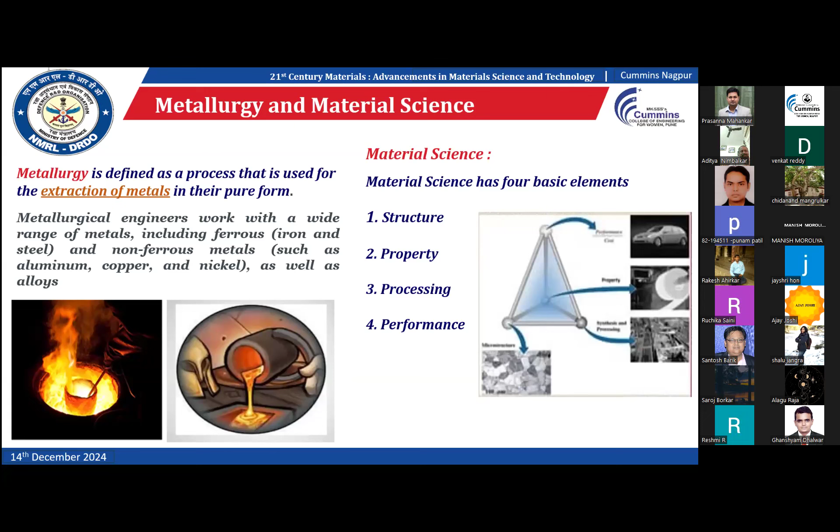Material science basically involves destructive and non-destructive testing. Non-destructive testing is done after the product is formed, and destructive testing is done before. Basic characterization requires chemical analysis, tensile strength, impact strength, and fatigue strength. So that is the difference between metallurgy and material science.

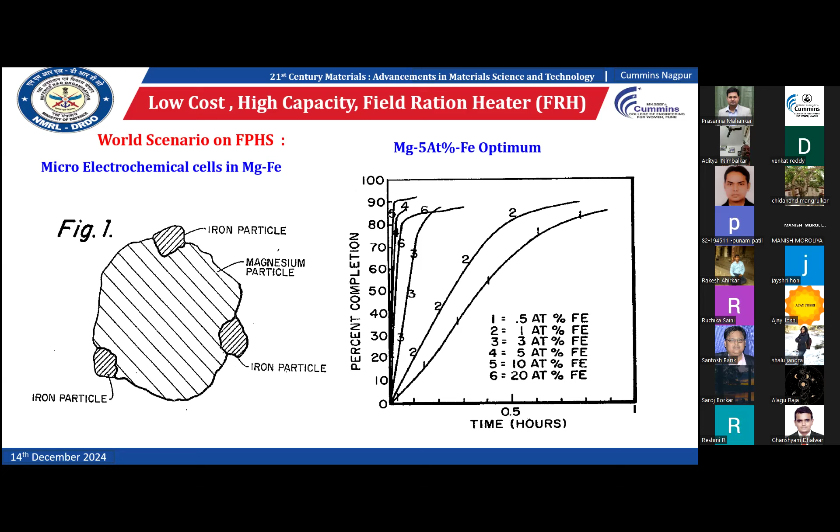Now I would like to discuss the first material we have developed: a low cost, high capacity field ration heater. It basically started from America, using magnesium and iron - a patented technology from the USA. We took this magnesium and iron composition and added extra aluminum. With this patent, they mentioned the heat containment and heat release, converting material at -5 degrees Celsius into normal temperature. It took 12 minutes and reached a maximum temperature of around 62. But in our case, with this patented technology, we use aluminum, iron, and magnesium with 5% iron.

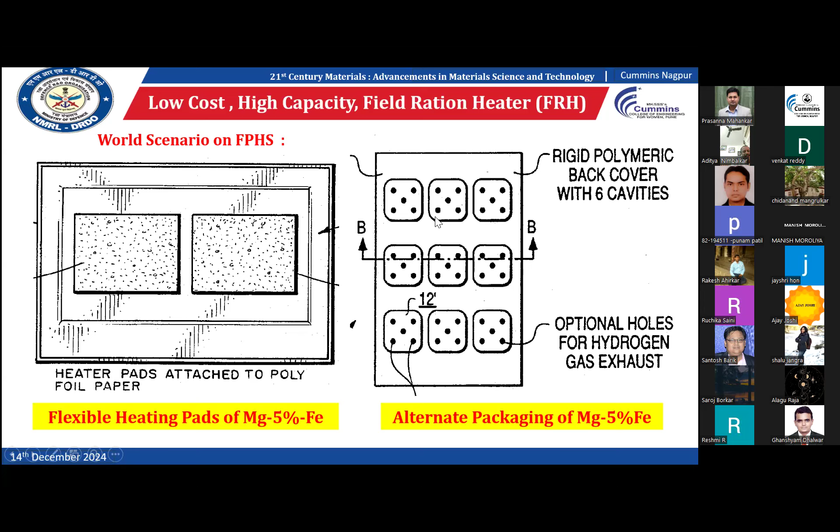They use polypropylene cloth to hold the material. So we took this patented approach and carried it out at NMRL. Here you see 28-gram material used for 300-gram pulao, ready-to-eat meal, which is a requirement from the army. In the army, during winter, the outside temperature is around -35 to -40, and soldiers can't eat properly - they only get one piece of rice from the ready-to-eat meal provided by our government. Also, aircraft cannot land during winter, so we needed a way to convert pre-cooked material back to ready-to-eat condition. That's why we developed this technology.

So instead of just magnesium and iron, we add aluminum, and this creates an exothermic reaction. There is a requirement for formation of microcells, meaning layer by layer material. For that we use ball milling, keeping the aluminum, iron, and magnesium in the ball mill for up to 14 hours, then we screen this powder for use in this application.

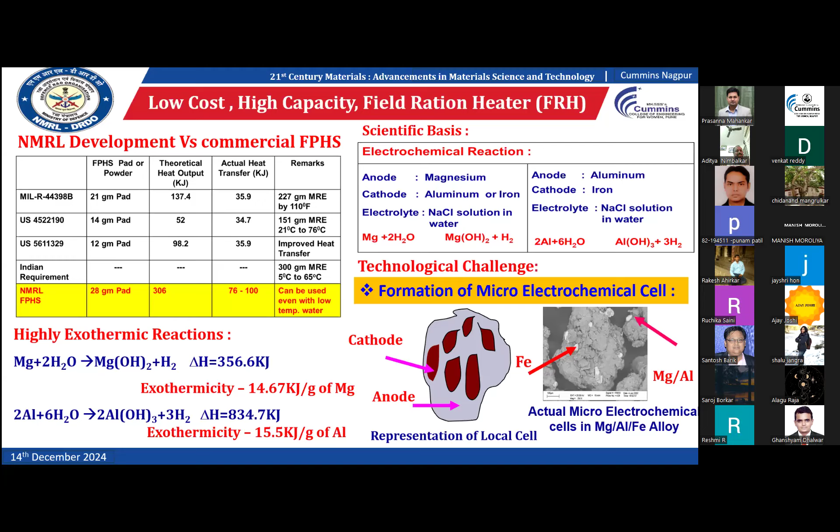In terms of cost benefit, the USA material with magnesium and 5% iron costs 1 rupee, while our Indian version costs 0.39 rupees. With only 2 grams of material and 2.5 ml of water added, you get a temperature of 85 to 95 degrees, starting from an initial material temperature of -5 degrees. We use 28 grams of this material for 300 grams of pulao, easily available in the ready-to-eat meals provided by our government to soldiers.

We carried out tests at -5, 0 degree and 5 degree temperatures. This graph shows the material reaching from -5 degrees to 85-95 degrees within 15 to 20 minutes.

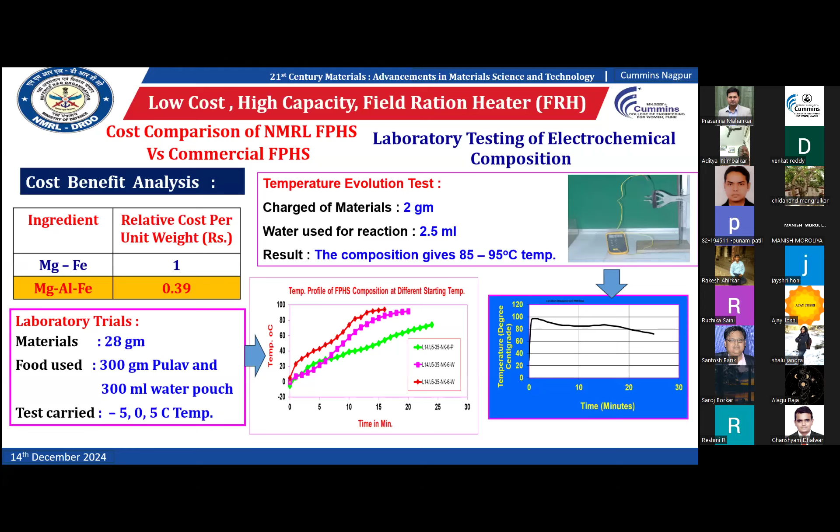It is close to our pressure cooker temperature, which is a good thing. After that feasibility study, we carried on laboratory trials. We converted these and demonstrated the trials at K-top, which is the highest height above sea level, 18,000 something.

So we demonstrated the kit - this is the reusable bag, this is the heating pad. You see here, there is a powder, we put 4 number of packets on one side and 4 number of packets on another, using 2 heating pads for 300 grams of pulao. We put it into this aluminum bag and add just 50 ml water.

After adding the water on both sides, 50 ml on one side and 50 ml on the other, you see the soldiers doing the job. Within 15 minutes, they got more than 85 to 90 degree temperature. This trial we successfully carried out 18,000 feet above MSL, at Khardung La.

It is very close to the China border. We demonstrated this technology to our Jawans, our soldiers, and our officers, naval officers also, and they were very happy. They wrote a letter to DRDO.

As per government norms, every 3 years they transfer troops to another location. But after this successful development of the new material, they said we cannot shift it anywhere - we will continue for the nation's soldiers on the border. And we got a 5 lakh award from the Vajpayee government for this work.

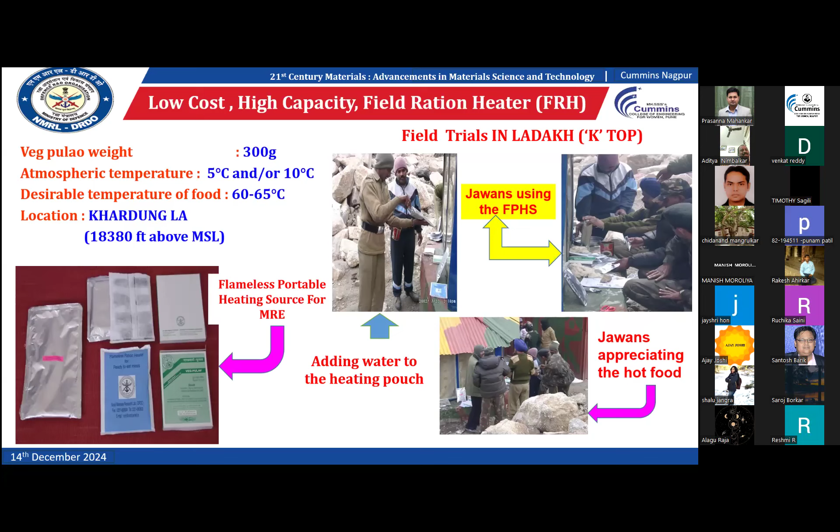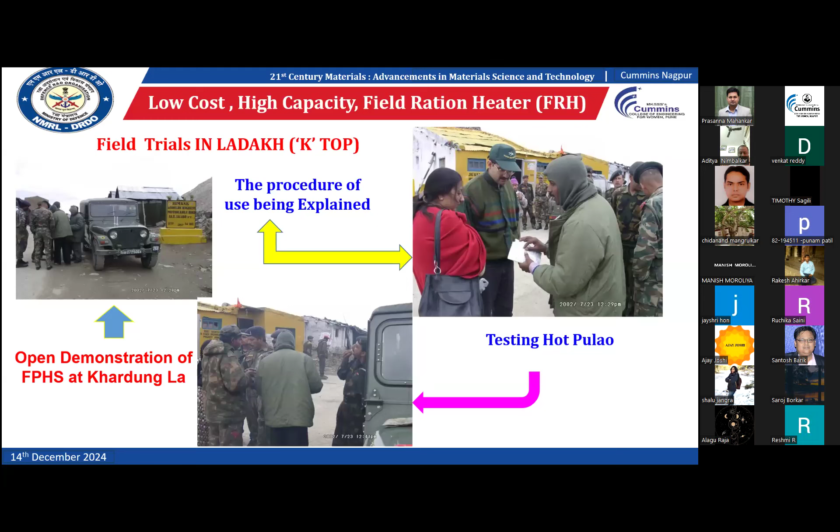Then during our demonstration, some military officers visited, so we also demonstrated that technology to them. After these army and naval applications, we wanted to check the commercial application of this product.

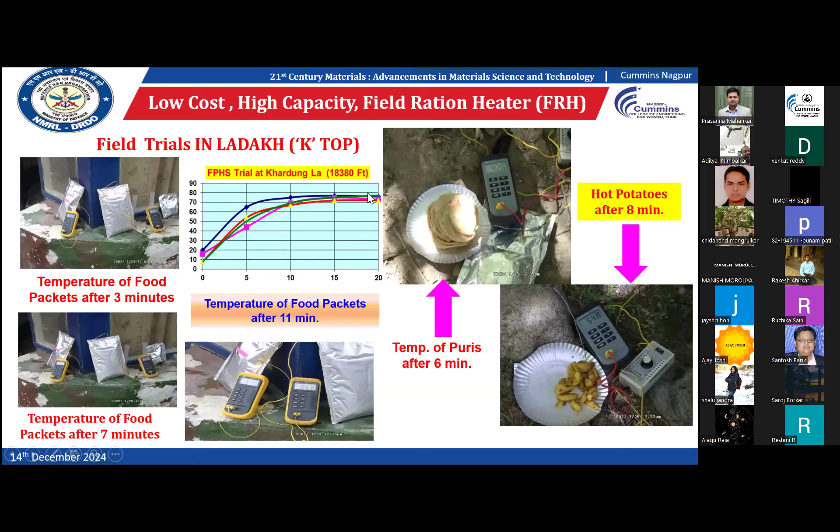So with outside temperature at minus 35 and 40 degrees, we kept some puris and potatoes, and put these puris in our heating pad. We added 50 to 100 ml water on both sides, and in K-top we found that within 20 minutes, the temperature was around 80-85 degrees. So that was also successful.

Another application of this product is for diesel fuel tanks. Before this product was developed, our soldiers used to keep their vehicles running full night. If they switched off the vehicles, the diesel would freeze, and the problem was how to convert that frozen diesel back into normal liquid.

That's why we developed this. They used grass for this purpose too - we found sometimes they would put grass on the tank and burn it on top, and some accidents happened because of this. But after using our heating pads, you see here, minus 50 degrees Celsius diesel converted into normal liquid without adding any chemical inside the diesel tank, and their problem was solved by this technology.

Second, at midnight we carried out trials - this is an ice pot, with chapatis and dal. They gave another task - at the 11,000 feet Karoo troop location, they asked DRDO to carry out trials at Karu at midnight.

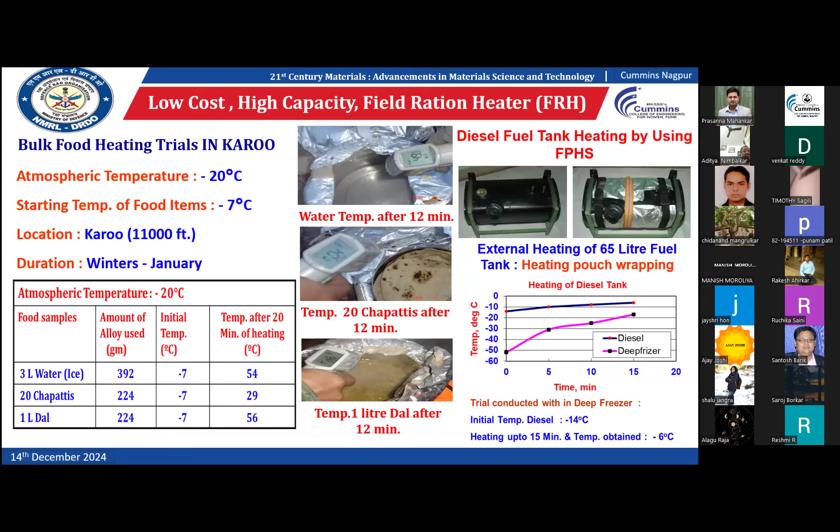Then sir, there is a biggest problem - they apply IV fluid to our soldiers in medical treatment, but outside temperature is very low, so our IV bottle freezes. So they asked us to utilize our composition of this material - magnesium, iron and aluminum - for converting that solid fluid back into liquid.

But the problem is our temperature reaches 85-90 degrees Celsius, and they want - there is a restriction - our body temperature is maximum 39 or 37 degrees. So the challenge was how to maintain the fluid temperature around 37 to 39 degrees, but for a longer duration.

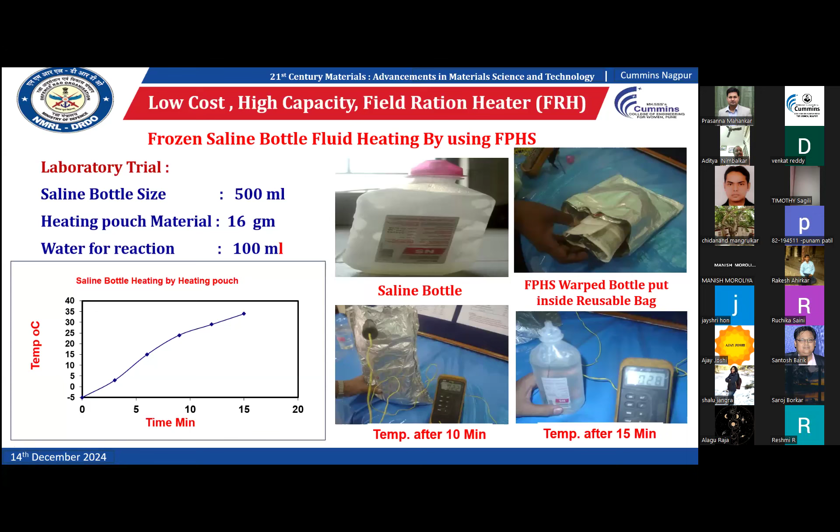And then we found our soldiers had not taken a bath, maybe for 3 months, 4 months also, because they don't get water.

This is the setup actually, and we have patented this, American patent also and Indian patent also for this technology. So this is the technology we have developed and successfully transferred to industries in India for this product only: heating pouch, saline bottles and other purposes for army purpose.

But another requirement they have is body warming for soldiers. They initially had some Bukharis, but those Bukharis are kerosene based, and the top of that Bukhari is open. In winter, with snowfall, snow falls on that chimney, and the entire carbon monoxide comes back, and our soldiers had died.

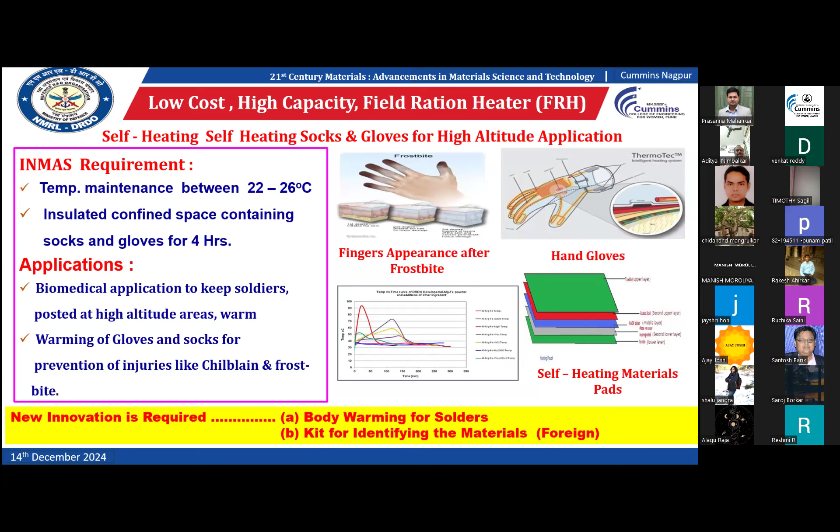So the Singapore person asked NMRL to support this activity, but from some point of view regarding other countries, we are not supporting it. But you can take this opportunity, you can make the powder at your premises and you can do it. So that is the opportunity from this activity.

Another activity is semi-solid metal processing. In this, as you may have seen in previous presentations, there are a lot of composite materials, rolling materials, forging materials, casting materials. We have to develop this material for aluminum technology, aluminum process. Normally people carry out rolling: first melting, then billet making, then extrusion, then forging, then machining. This is a very lengthy process. So this is the beauty of this technology.

We make this material at a very low temperature. Aluminum melting temperature is 650, but we carry out this process, aluminum alloy, in a range of 610 to 630 only. And at that temperature, we press this material at high pressure, around 2000 bar. With that 2000 bar, there is no single porosity.

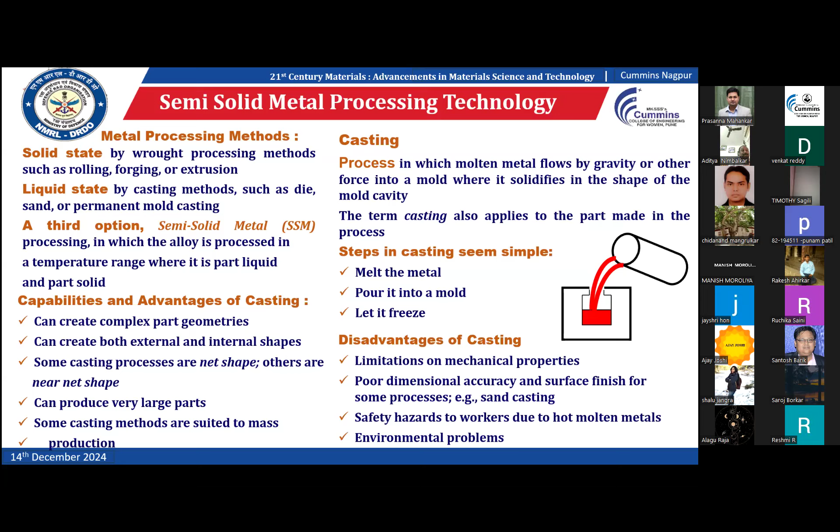But this material is not pure aluminum processed; we require alloy, aluminum alloy. So we will tell you the detail of this technology.

You see here, this is a pure material, cooling curve. Metal starts from cooling. This is the liquid, then cooling. It is a single process step. And here you see a two-stage material: here the material is in liquid stage, here it is solid. So whatever the range is there, the liquid-solid fraction is there.

Those alloys can be used for this technology. That is a challenge. And second thing is that in the solid-liquid to solid transition, there is some time requirement also. If we carry out processing, the material should not be frozen, otherwise the entire thing will be choked. So that is the scientific challenge.

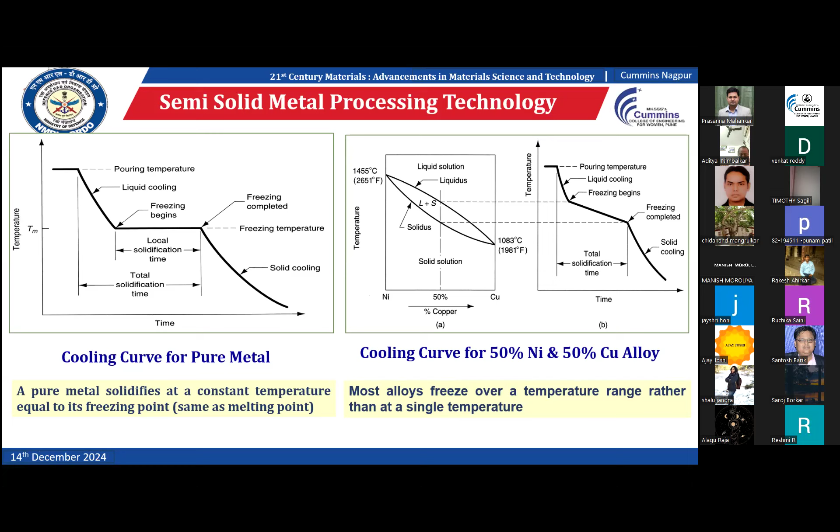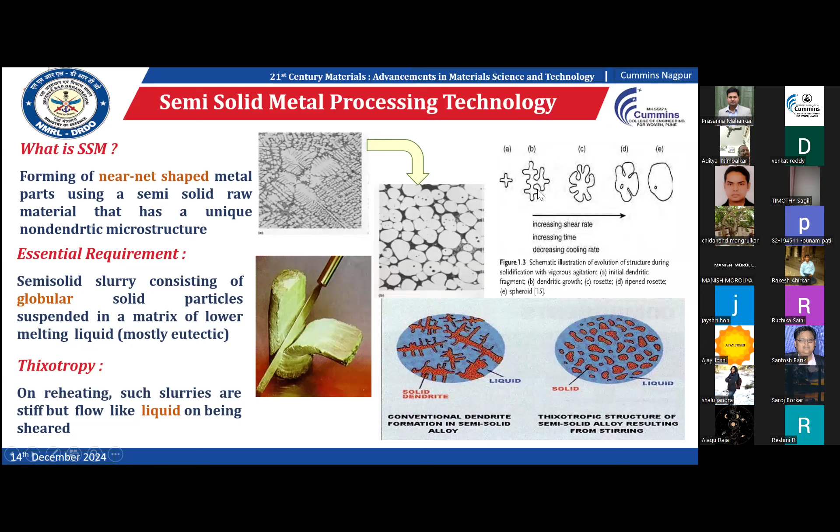Whatever material we utilize for this trial should cut just like this process, just like how we cut tomatoes in our house. Such type of cutting is required. This is the dendritic microstructure normally found in all materials, and we want to convert it into the globular shape. So this is the procedure for converting that dendritic structure into the spherical shape.

This process was discovered by MIT in 1971, and its origin comes from observing butter and toothpaste in our house. That is what gave the idea for this technology.

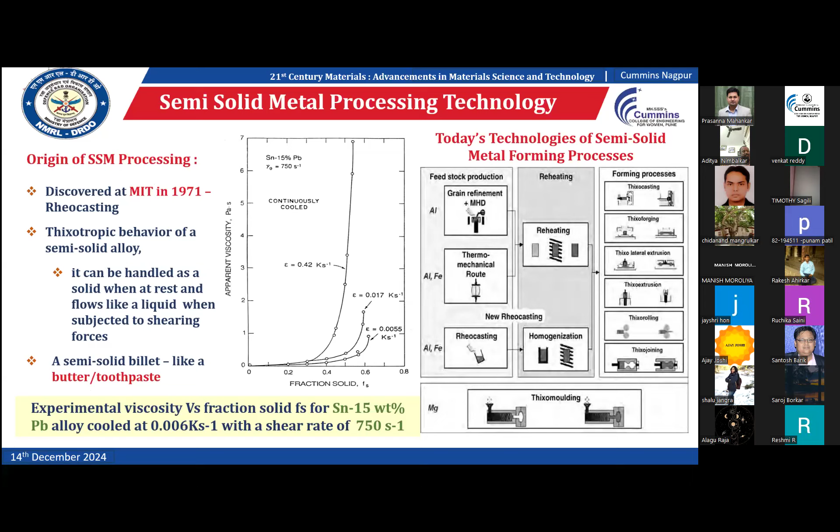There are three steps in this process. First is the slug, whatever the material or alloy - aluminum alloy, we have developed 2014, 6061, 6063. These were developed by NMRL, and we have developed some high-strength aluminum alloy for naval platforms. So we cut it into some shape, reheat it by induction heating into the semi-solid stage, then transfer it into the die.

You see there is a liquid-solid material and time diagram - this is the diagram we require for the calculation, for knowing what time we start the rotating electromagnetic stirring and what time we have to stop. With the help of this, we generate this phase diagram, and we carried out the experiment at NMRL.

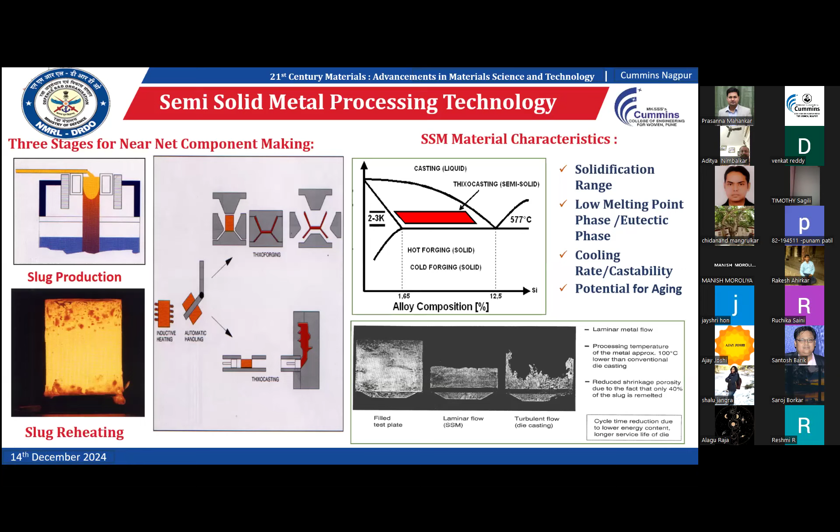Normally, laminar flow is required. Whatever material in your utensils or the normal market - aluminum, steel - that is not laminar flow, it is turbulent flow. That is the difference between our material and normal material. So quality-wise, our material is very high, very good. There is no porosity, surface finish is good, and intricate shapes are possible.

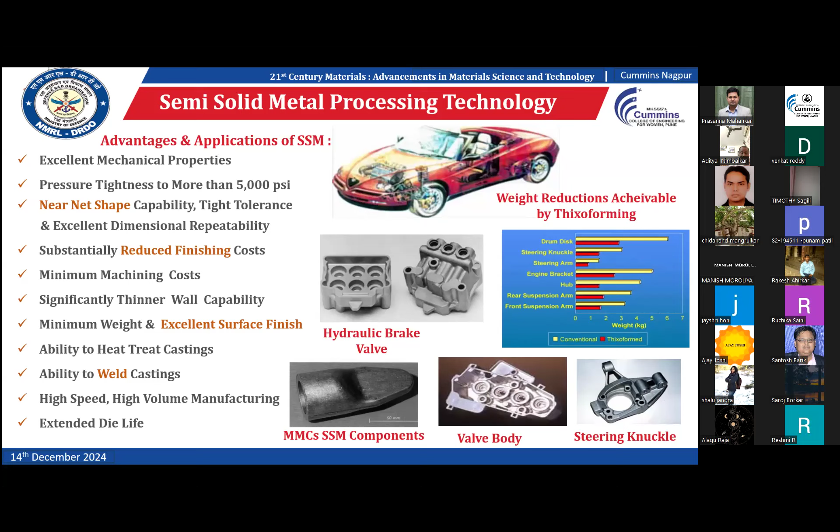This is the first such machine in India - a 2 crore machine in NMRL, and we have developed a lot of components by this technology. You see this globular structure - normally, commercially available A356 material in the market has strength around 200 to 250. We got 320 to 350 with this technology.

And the major beauty of this technology is elongation. We found this elongation is 20%. Normally, the maximum ductility of aluminum material is around 8%. So that is the beauty of this technology.

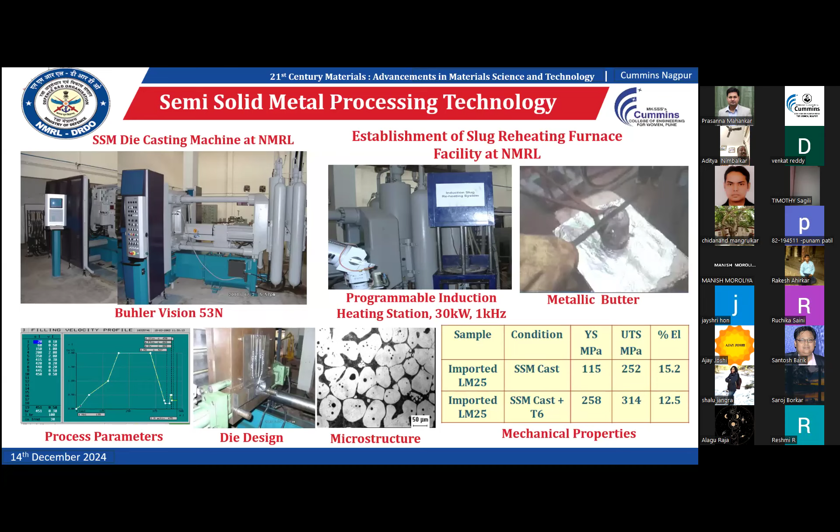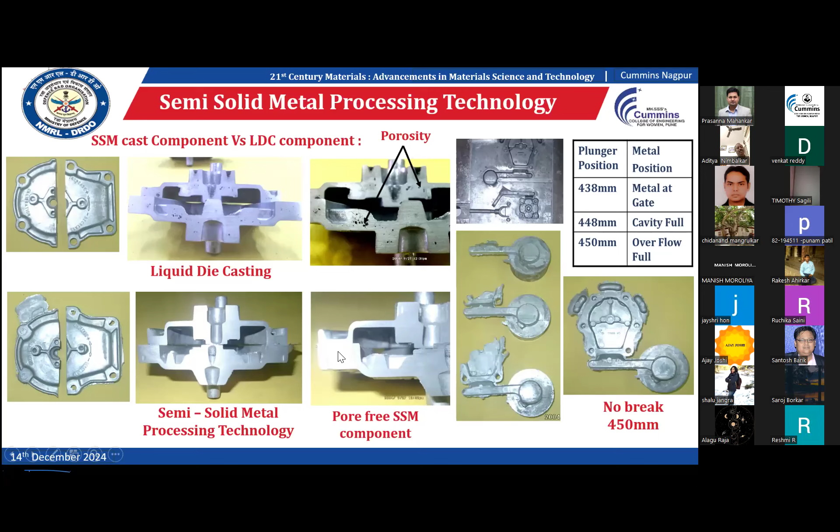I already told you this is the normal component - whatever component is made by the die casting process, you see here a lot of porosity. This component is used in our petrol pump for commercial application by L&T. So they asked NMRL to provide support for making this component without porosity. You see down the line, this is our process component - there is no single porosity, and this component also withstood maximum 5 bar pressure.

Another component is for a Russian engine, for ship use. Here also we initially carried out some simulation modeling, and after that simulation modeling we identified the temperature - what is the solidus and liquidus temperature. Then we carried out trials and successfully delivered this component to the Navy for ship as well as missile application.

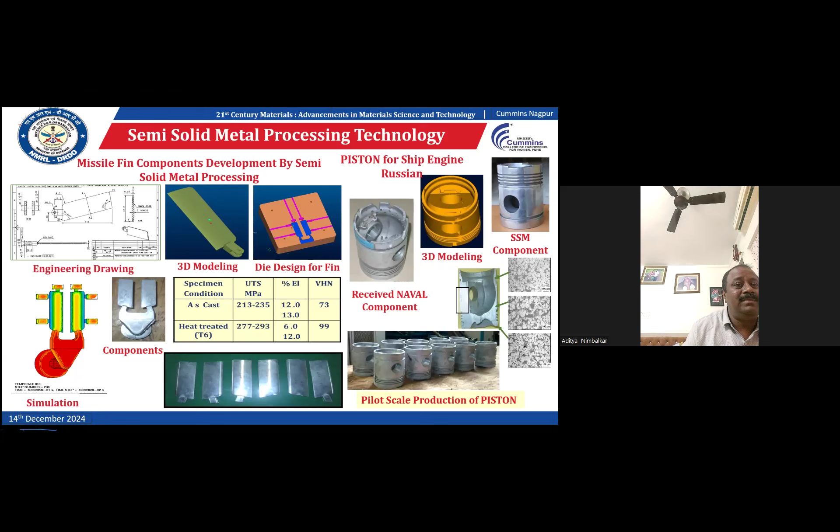So in this process there are some disadvantages. One is billet making - after that billet making, we have to cut the material into a limited shape, and again carry out reheating, and there is a restriction on L by D ratio. Your material length should be within a range; if your length is more, then after reheating, your slug will be broken in the middle - that is one major disadvantage. The third one is how to transfer this material into the sleeve of the machine, because there is a temperature of 700 degrees Celsius. If you're putting on high temperature gloves, there is some problem for our workers. So there are lacunae in this technology.

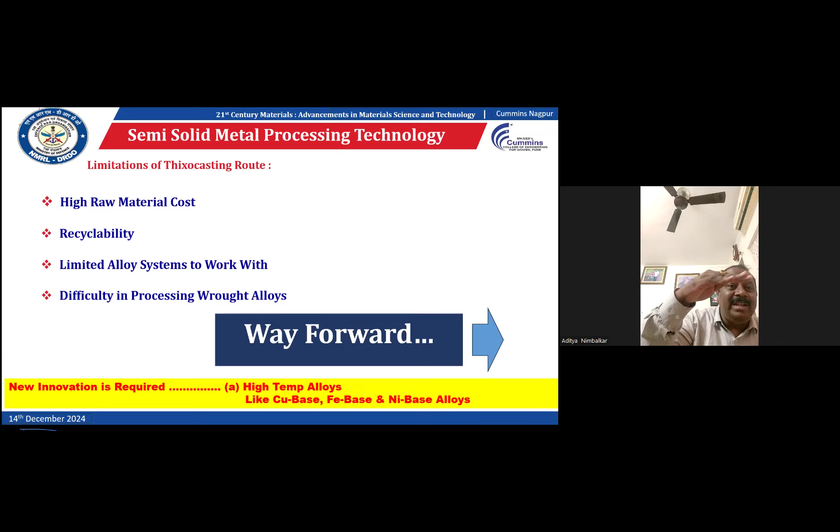So NMRL, as scientists, moved this technology forward into a liquid state - directly pouring the liquid, and within that range we convert the material into the primary spherical shape and make the component. That is the technology we have developed. So you see, new innovation is required here.

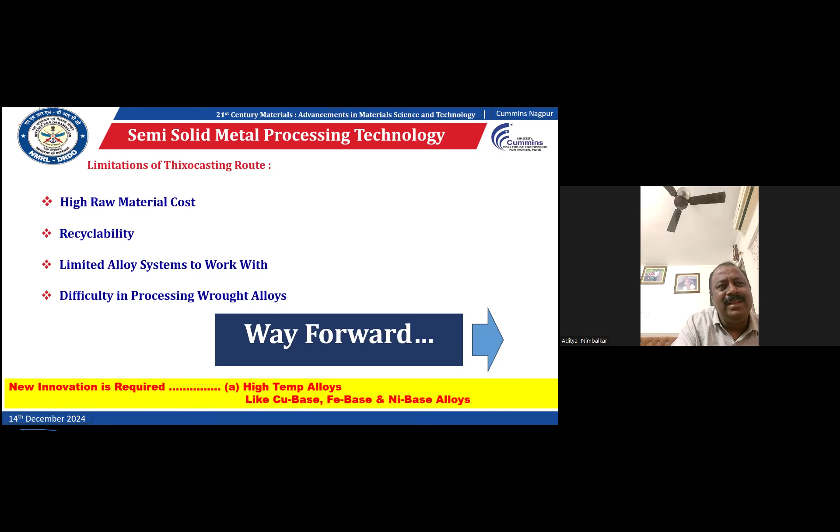We have made this only for aluminum alloy, but you can think of copper base, iron base, and nickel base too. Take these opportunities through the NRB board, propose, and we will support you with our machine facilities, not only at our NMRL, but also IISc Bangalore and one or two private industries. You can take help from them also and carry out good academic basic research for copper base, iron base, and nickel base materials.

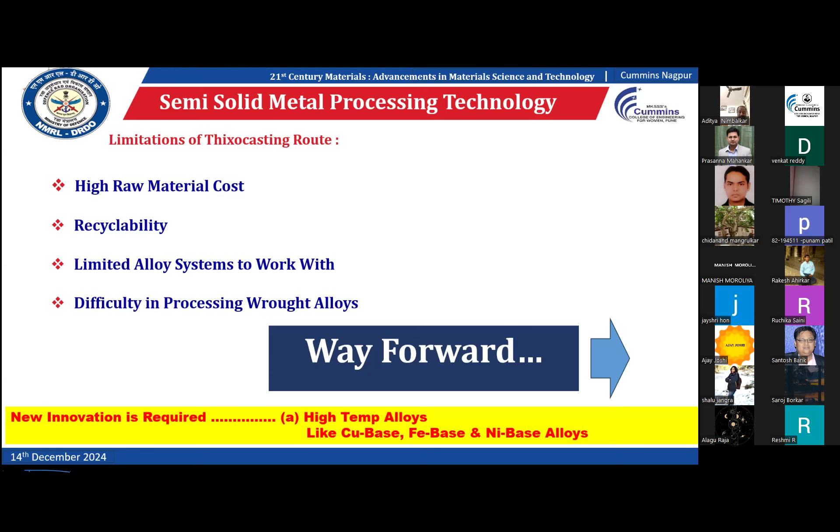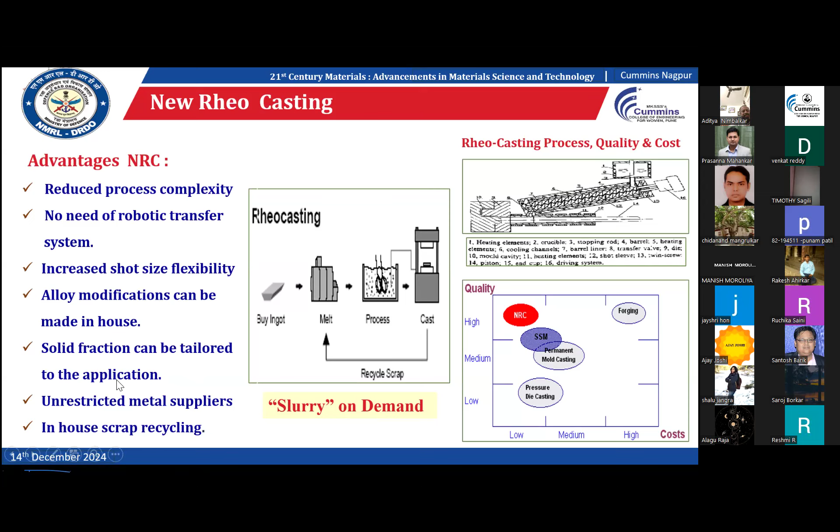Second thing is recycling. There, if you recycle the material, your entire properties degrade. But here, there are no properties which collapse - whatever properties you get in the final component remain intact.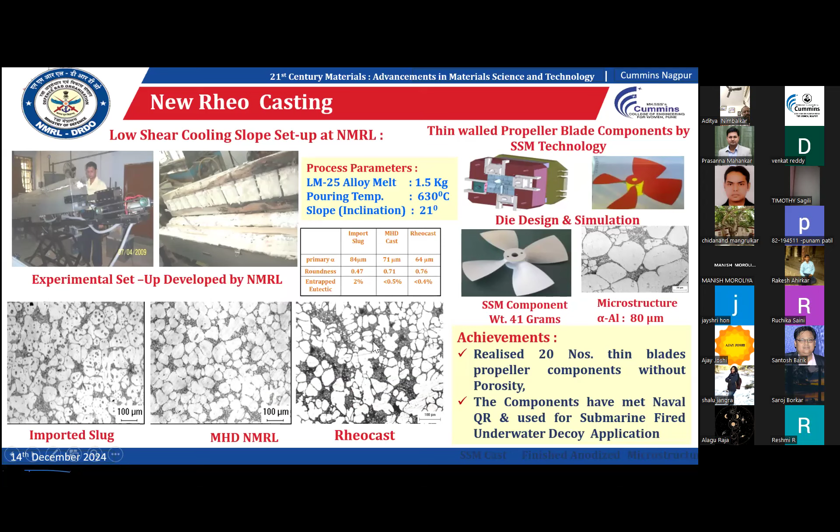This is a cooling slope made by NMRL. We pour the material at this end, and the length of this cooling slope is around 2 meters. The initial pouring temperature is around 630 degrees Celsius, and at the other side we get it around 590 or 595 degrees. These are the initial microstructures versus the rheo-casted material microstructures - very good, very clean microstructures.

Everybody knows Sunita Williams - ISRO found some problem with electronics packaging material, called the standard Deels chassis component. ISRO was also facing this problem. There is a 4 mm thickness material, and normal machining with Z axis, Y axis machines is not feasible for this process.

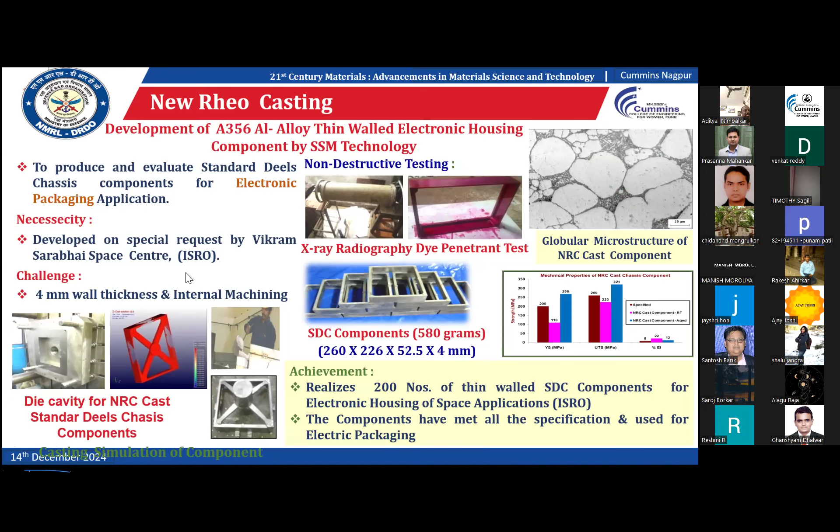So they approached NMRL to carry out this component. We made the die, carried out simulation, and successfully developed this component, providing 200 units of aluminum alloy A356 to ISRO. They are very happy and regularly use this component.

And for BrahMos, I already explained - it is a clamp component they use for joining these distributors together, where there is hot gas present. They were making this component by a machining process involving melting, billet making, forging, then machining, which took them 3 months for 2 components. In our machine, we provided these 2 components within 20 seconds.

Their requirement was 275 yield strength; we provided 284. Elongation requirement was 10%, we gave 8.5, and hardness is also higher. We provided 25 numbers of these components to BrahMos, and they successfully carried out trials. After that, we transferred this technology to 3 companies in India.

This is regarding new materials - zinc aluminum. All the ordnance factories are working on this, called ZAMAK 5. It is a zinc-based material, with 90-95% zinc and the remainder aluminum. They are facing a lot of problems - whatever process they use for making these materials, they found a lot of porosities and segregation on the surface of the materials.

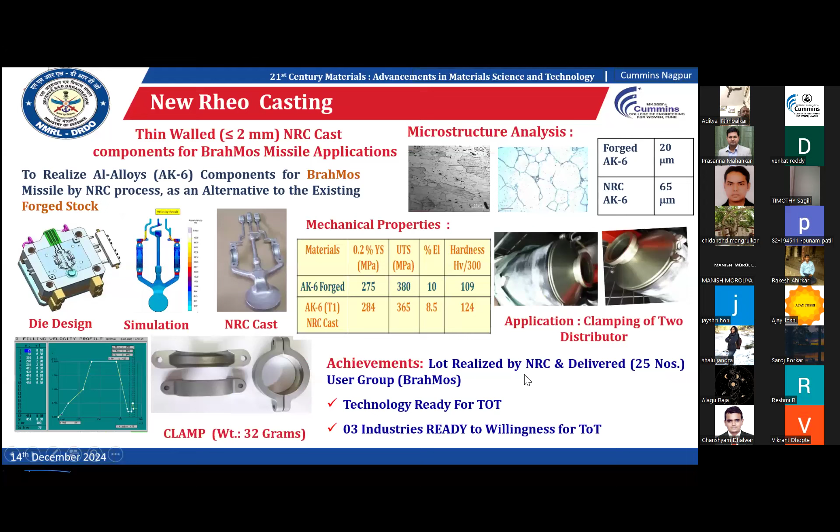As soon as temperature reaches a certain point, that rod melts due to the low melting temperature of zinc, around 440 or 450 degrees. We carried out a lot of experiments at NMRL and transferred a defect-free product to the company, all the ordnance factories. They put this material in this application, and it successfully enhanced the speed of the product - initially around 120-140 kilometers, after using our product they targeted enemies at 180 kilometers.

So these are the new materials and new processes, and their applications are already being found in our army and navy. With this, thank you.

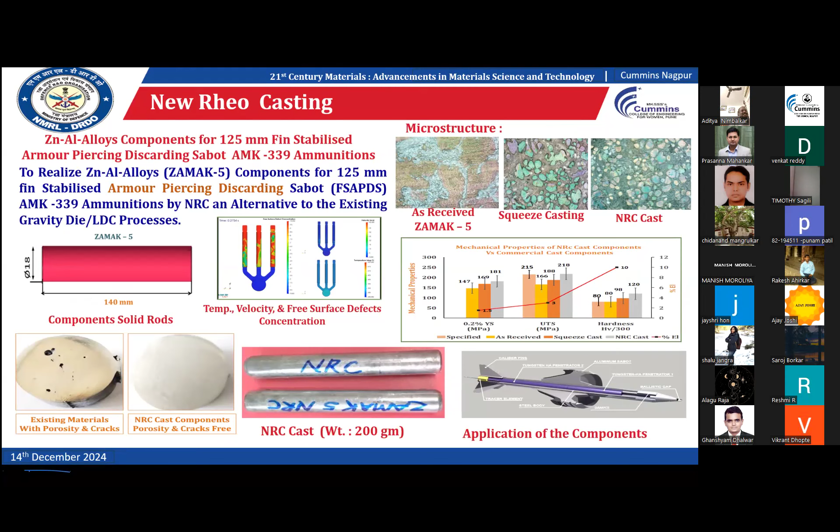I will also share some other materials for academic purposes. Recently, we are working on high entropy materials. Normally the base material is 95% iron, but in high entropy materials, only 55-60% iron is required. Academia can start work in this area, as very few people are currently working on it.

Another new area is complex concentrated alloys and friction stir welding. These are new areas you should think about and approach with 4-5 students, as per our Prime Minister's vision of involving students and academia in research. So please don't miss these opportunities.

This presentation is also for faculty purposes, so I request all faculty interested in carrying out PhD work to consider this. We have a lot of equipment, better than IITs, so you can utilize these facilities for your PhD purposes.

Once again, thanks to Prasanna sir for providing me this opportunity. One day I will come to my native place, and at that time we will give longer lectures. Today, there's also another meeting at 5:45 online, so I will finish. Thank you.

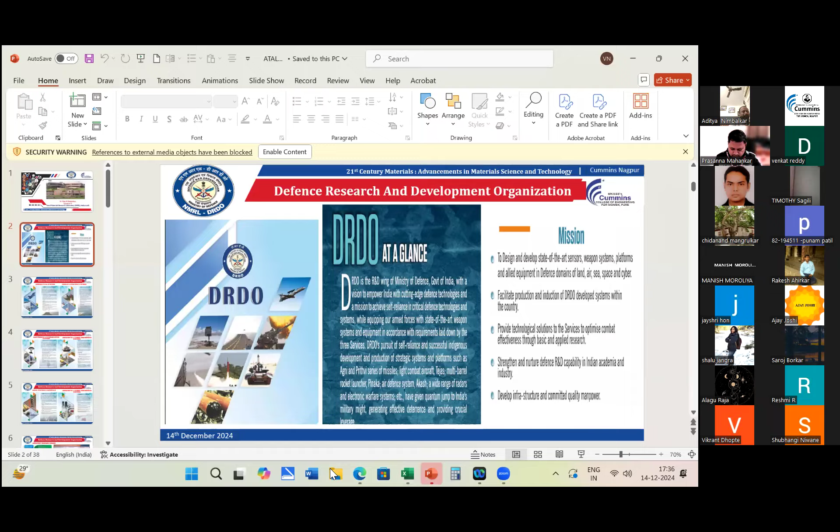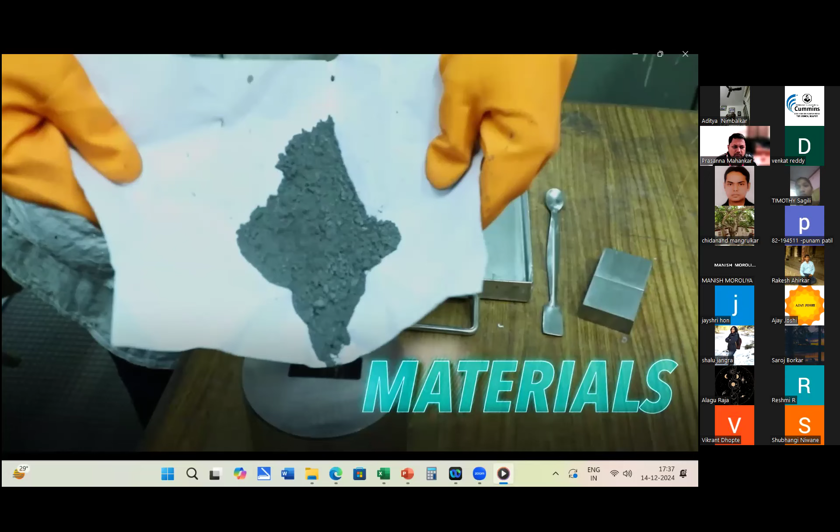Hello, hello. It got hanged somehow. Yes, I think so. Nimbalkar sir, maybe some connectivity issue from their end - I think he was playing a video, and video requires large bandwidth. Okay, anyway. Sir, Nimbalkar sir, are you there? Anyway, I think Nimbalkar sir is joining.